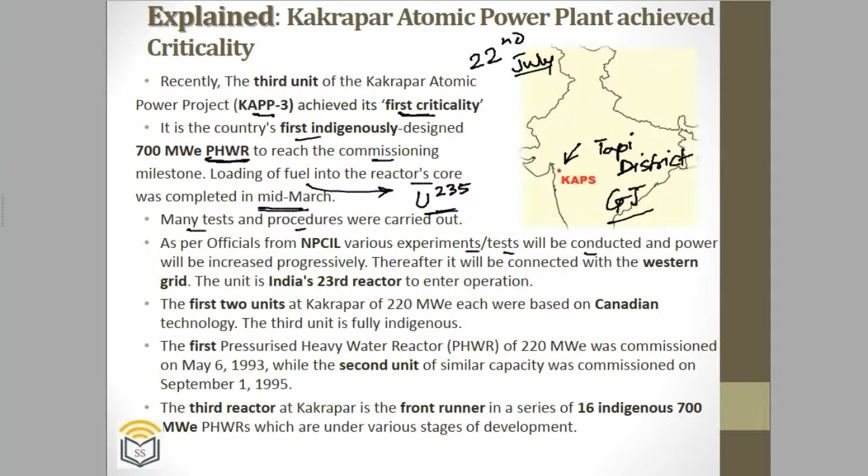After that, many tests and procedures were carried out as per the NPCIL guidelines during the lockdown period, and as per the NPCIL officials, various experiments and tests will be conducted, and after that the power produced by this reactor will be increased in a gradual manner. NPCIL stands for the Nuclear Power Corporation of India Limited,

and thereafter it will be connected to the western grid, where the power produced by this reactor will be contributed, and this is India's 23rd reactor to enter into operation. The first two units of the Kakrapar atomic power station are of 220 megawatt electric each, and they are made on Canadian technology.

This third unit is totally made in India with indigenous technology and indigenous manufacturers, and the construction was completed with the help of Indian contractors. The first pressurized heavy water reactor of 220 megawatt electric was commissioned in 1993, while the second unit of the same capacity was commissioned in 1995 at the Kakrapar power station.

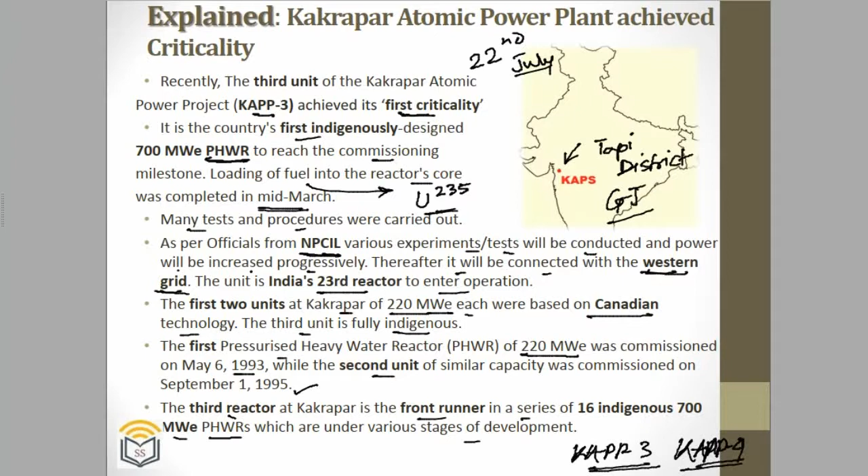This third one is of indigenous technology, and it is the front runner in the series of 16 indigenous 700 megawatt pressurized heavy water reactors, which are under various stages of development at the moment, and slowly they will be commissioned. There is another unit which will be commissioned in future, KAPP4. It is also of the same 700 megawatt capacity and also made with indigenous technology.

Now let's see some details about this third reactor. The site works at Kakrapar were completed by August 2010, and first concrete for the third and fourth reactors was done in November 2010 and March 2011 respectively. This concrete is used in atomic reactors to protect or to place the reactors, and this is done after AERB approval,

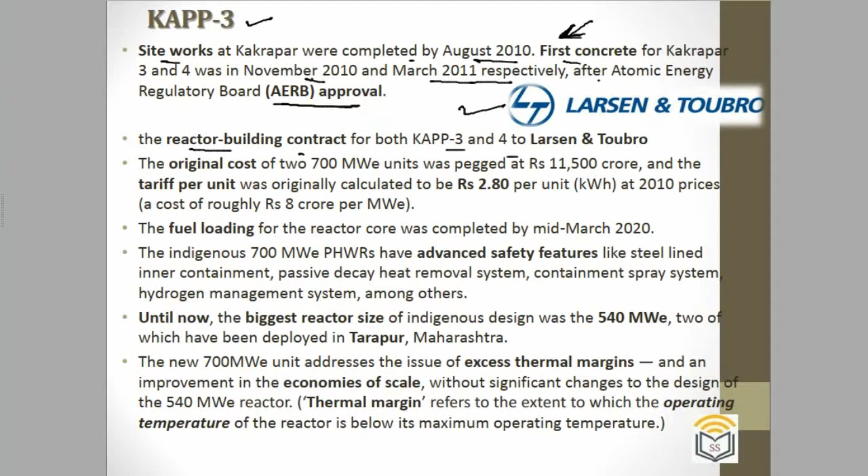and NPCIL awarded the reactor building contract for both the third and fourth reactors to Larsen and Toubro, costing around rupees 844 crores. The original cost of the two 700 megawatt reactors was pegged around 11,500 crores, and the tariff is fixed at rupees 2.80 per unit, that is kilowatt hour, at the 2010 price. If calculated, it comes to around 8 crore per megawatt of electricity generation, which is a little less than thermal power plants.

The fuel loading in the reactor core was done by mid-March 2020, and these indigenous reactors have some advanced safety features like steel lined inner containment, passive decay heat removal system, containment spray system, and hydrogen management system. Until now, the biggest reactors were in Tarapur, Maharashtra, which are 540 megawatt capacity reactors, and there are two of them there.

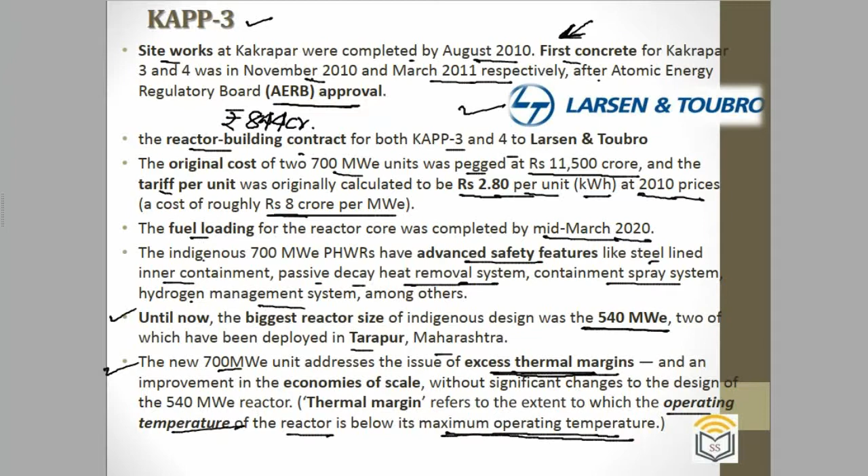This new 700 megawatt electric reactor unit addresses the issue of excess thermal margins. By thermal margin, we mean the margin between the operating temperature of the reactor and the maximum operating temperature a reactor can reach during its operation. This excess thermal margin issue is mitigated by this reactor, and it is basically an improvement in the economies of scale without sacrificing much in the design of the old reactor.

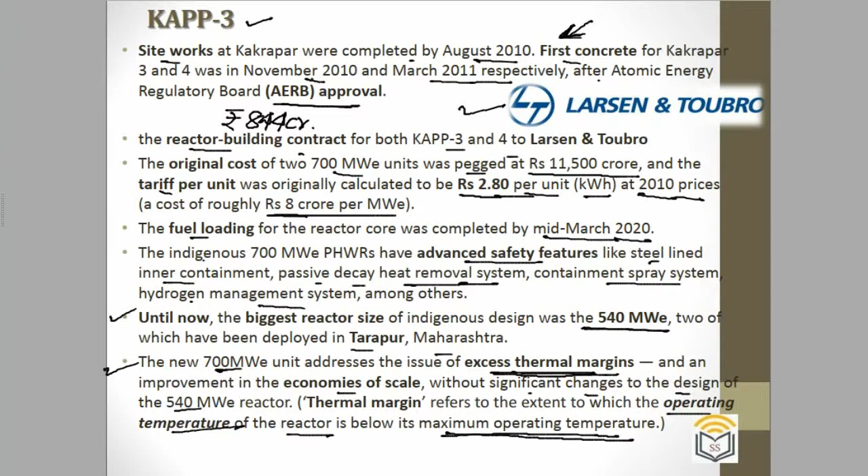So let's see what criticality means for an atomic reactor. Reactors are basically the heart of atomic power plants, and inside these reactors a controlled nuclear fission reaction takes place. Now here, mark the word fission.

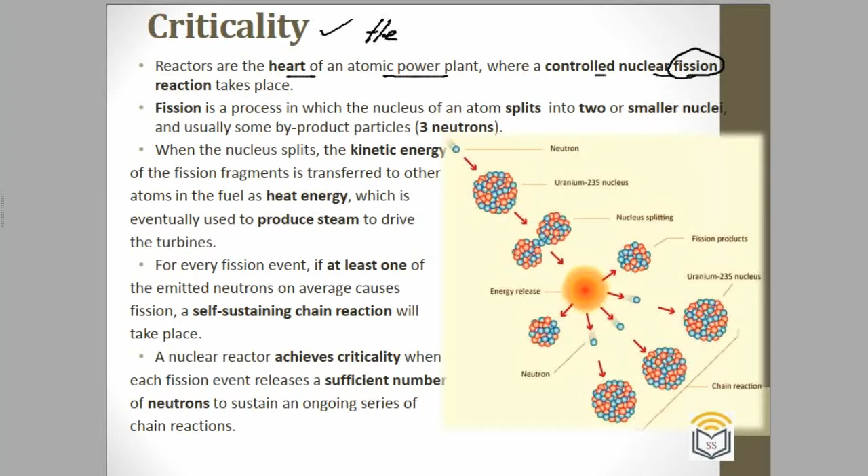By this fission reaction heat is produced, and this heat is used to generate steam, and this steam is ultimately fed to the turbines, and these turbines then generate the electricity. Now fission is a process by which a nucleus of an atom splits into two or more smaller nuclei.

Let's see this particular picture here. In this, a neutron is bombarded onto a particular atom, and this is nothing but a uranium isotope which is radioactive, that is U-235. And when the neutron is bombarded onto this U-235, the nucleus is getting split into two,

and ultimately the fission reaction is commencing, and it will create two lighter nuclei of krypton and barium. There are byproducts such as these, and these are three neutrons. This reaction releases huge energy, somewhere around 200 million electron volts. This is the basics of the nuclear fission reaction.

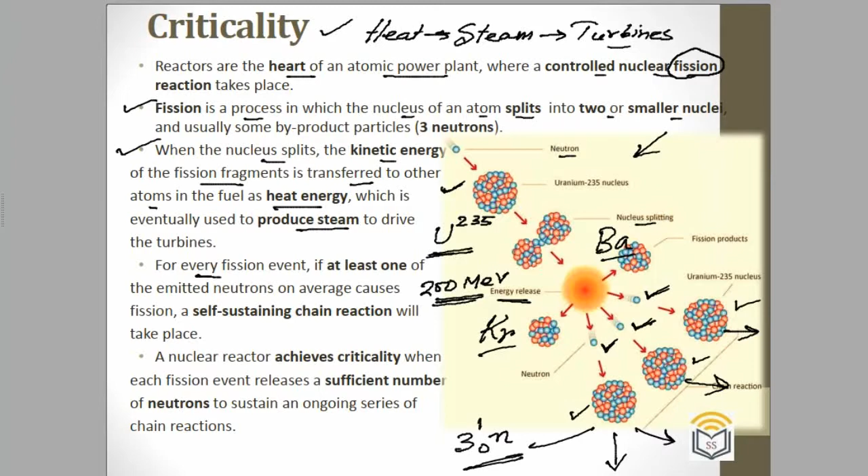So as it is seen here, when the nucleus splits, the kinetic energy of the fission fragments is transferred to other atoms. It is releasing heat energy, which is eventually used to produce steam to drive the turbines. Now for every fission event, if at least one of the emitted neutrons causes a fission reaction, a self-sustaining chain reaction then takes place. As we've seen here, a chain reaction is happening, and this is nothing but criticality.

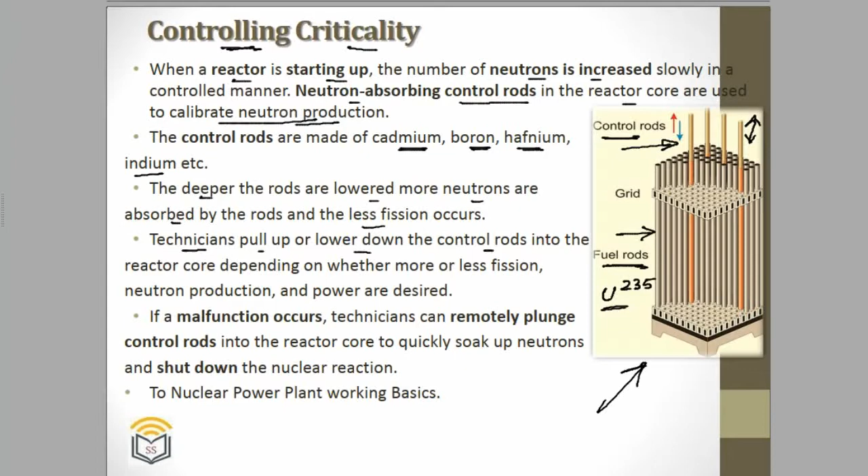So in power plants, technicians pull up or lower down these rods to control the fission reaction, that is the neutron production, and that is how they control the power as desired. And if a malfunction occurs, technicians can remotely plunge these rods into the reactor core to quickly absorb the neutrons and shut down the nuclear reaction. That is how they can control an impending accident.

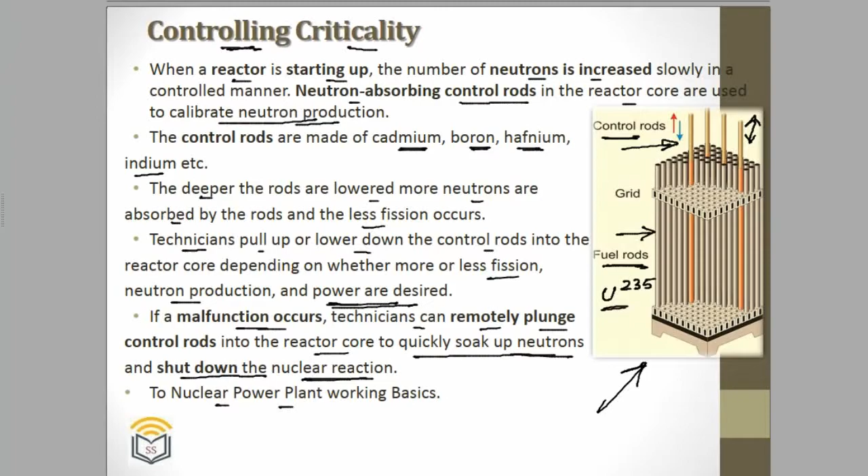So now let's see the basic working of the nuclear power plants to get a bigger picture. So let's go there. So this is a schematic diagram of a PHWR, or pressurized heavy water reactor, power plant, and this is the main area where the action is happening, that is the containment structure. And inside this containment structure, this is the reactor vessel here, and this is the pressurizer, then there is

a steam generator. So first this is the reactor where the nuclear fission reaction is happening and by which a lot of heat is generated, and there is pressurized heavy water inside of it, which is nothing but deuterium oxide or D2O, and this water is heated, and ultimately it comes in contact with this steam generator here, and there will be a separate water there, and after coming in contact with this heated water, this water will be boiled and converted into the

steam here, and this steam will be fed to the turbines here, and in this turbine the power is generated with the help of the generator, and this will be fed to the electric lines or grids. And now what happens, this particular steam is condensed in the condenser and comes back to water again, and this cycle goes on, as you can see.

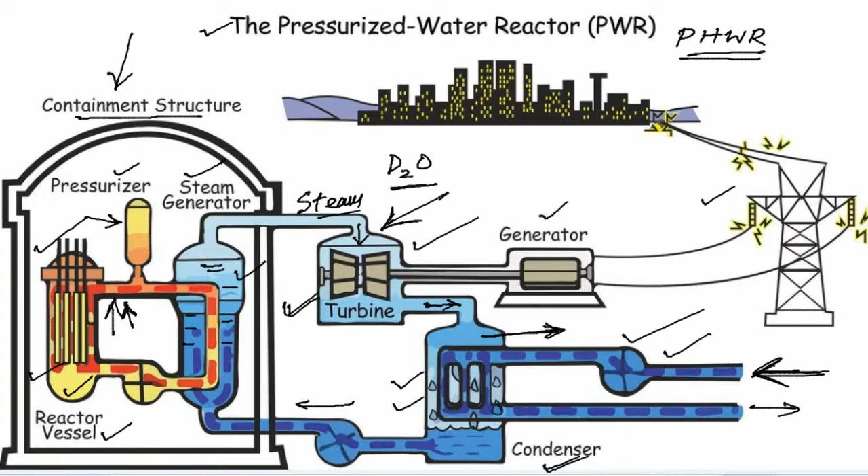So let's see why this achievement is very significant for India. Now this 700 MWe reactor is the biggest indigenously developed variant of the PHWR technology. Now PHWR, which is basically a reactor, commonly uses natural uranium as its fuel, and heavy water, that is deuterium oxide or D2O, as its coolant and moderator. And this technology is basically the mainstay of India's nuclear power program.

And this PHWR technology was started in the 1960s with a joint venture between India and Canada's nuclear corporation, by which the first 220 megawatt reactor was set up in Rajasthan. And with the second unit, India subsequently lessened the import from Canada. For the first time India pursued its indigenization plan in the setup of nuclear reactors.

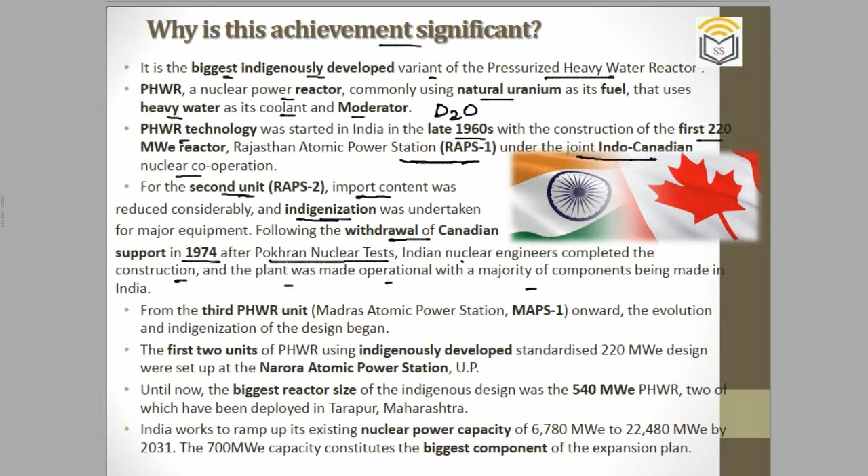And in 1974, after the Pokhran nuclear tests, there were subsequent sanctions on India in the use of nuclear technology. Canada withdrew from the joint venture, which put the Indian engineers to complete the construction, and the plant was made operational with the majority of its components made in India itself.

And from the third PHWR unit in Madras, that is in Kalpakkam, onward the evolution and indigenization process began. The first two indigenously developed units have a 220 megawatt rating, and they are set up in the Narora atomic power station, which is in UP. And the biggest reactor size until now is 540 megawatt PHWR, and two of them are set up in Tarapur, Maharashtra.

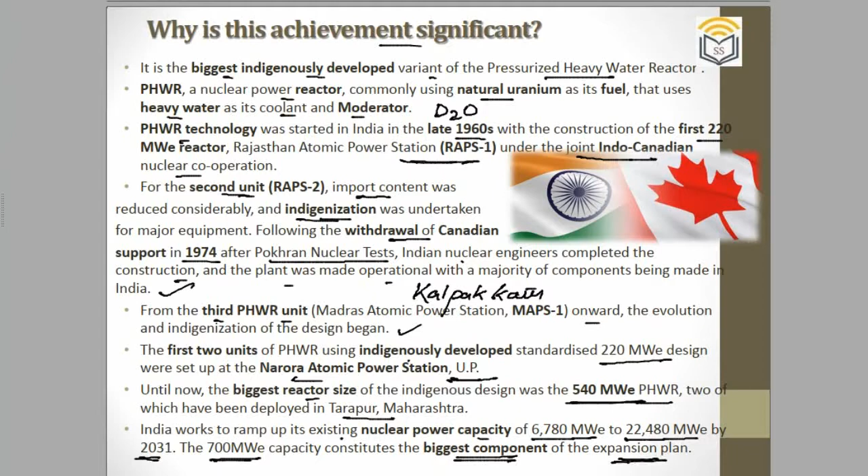And so India basically has ambitions to ramp up its existing nuclear power capacity from 6,780 megawatt to 22,480 megawatt by the year 2031. And to do that, these 700 megawatt capacity reactors will be the biggest component to achieve this dream, or the expansion plan of India. So this is the significance for India.

Now let's see the safety features of the PHWR and KAPP-3. The biggest advantage is that they have thin-walled pressure tubes instead of a large pressure vessel. Now there are small tubes like this.

Next, there are some additional safety features like the passive decay heat removal system, in which decay heat is removed automatically without requiring any operator, and there is a steel-lined inner containment to reduce any leakages in the containment area. We know that the containment area has the reactors, the steam generators and other pipelines which carry the pressurized heavy water, and this is made up of concrete.

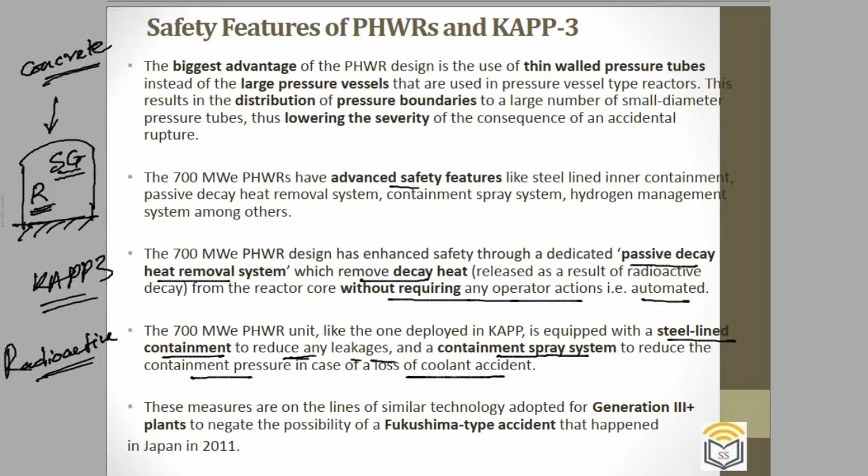In the case of KAPP-3, it also has a steel-lined inner containment to reduce any leakages, because it has radioactive elements or atoms which, if leaked to the atmosphere, are detrimental for humans and animals. It also has a containment spray system to reduce the containment pressure in case of a loss of coolant accident, and there is also a hydrogen management system.

These safety measures are in line with similar international-standard technology in Generation 3+ power plants, to negate the possibility of an accident like the one in Japan back in 2011, the Fukushima-type accident.

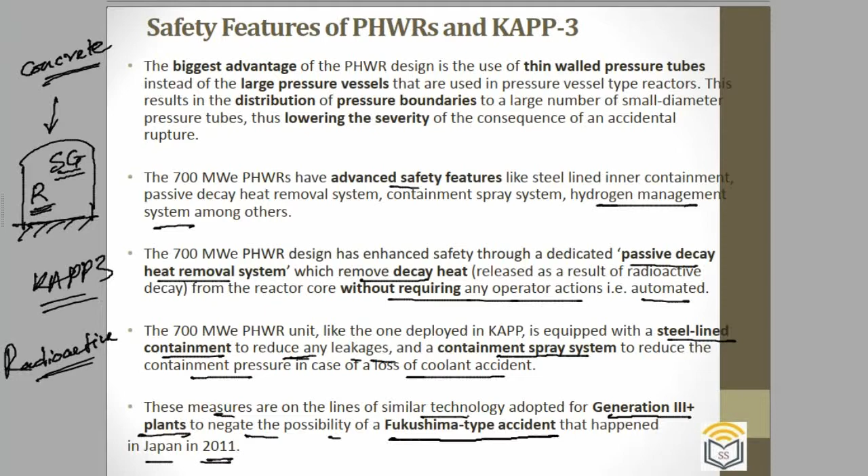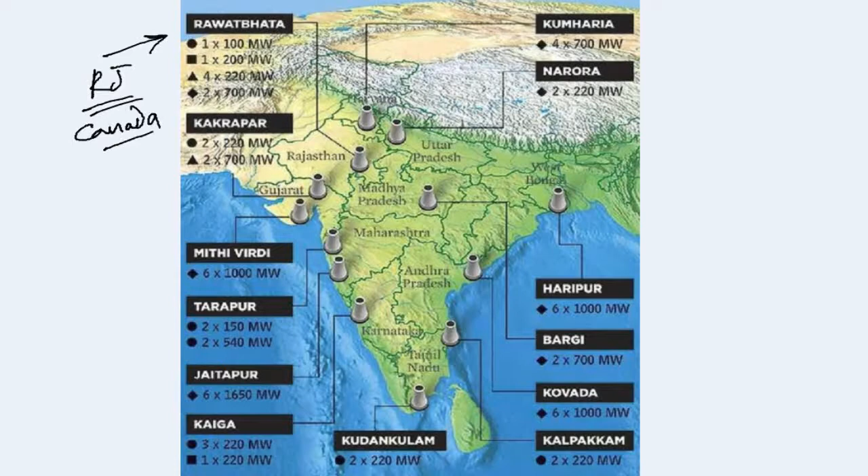So now let's see the different nuclear power plants in India. The first one is Rawatbhata, which is in Rajasthan, and this unit is in collaboration with Canada. Then there is Kakrapar, in Gujarat. Then there is Tarapur, in Maharashtra, and here is Jaitapur, also in Maharashtra, in collaboration with France.

Here is Kaiga, in Karnataka, and here is Kudankulam, in Tamil Nadu, in cooperation with Russia. There is another unit, Kalpakkam, also in Tamil Nadu. Then there is Narora, in UP. So these are the main atomic power stations in India, and the others are proposed ones, yet to reach the functioning stage.

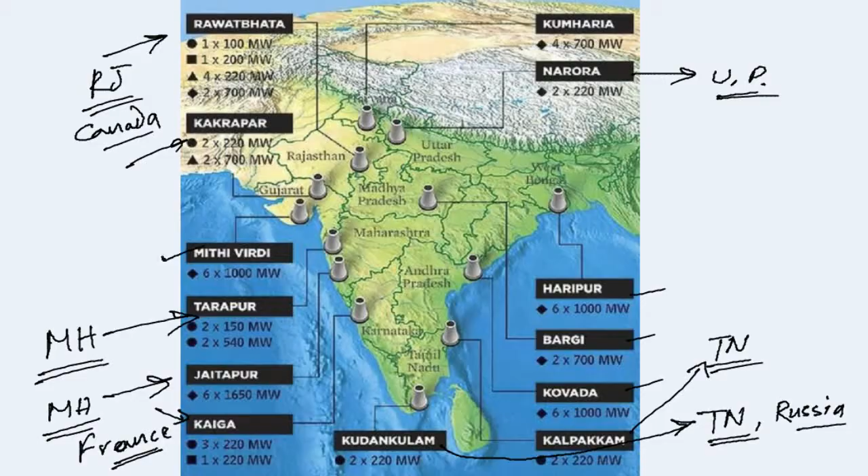Let's see some more facts about nuclear power in India. Until now there were 22 nuclear power reactors, and with the commencing of KAPP-3, this is the 23rd. Till the 1990s, Russia was a major supplier of uranium, and the waiver from the NSG, the Nuclear Suppliers Group, waived the sanctions on India so that India could commence international nuclear trade. Later, India signed Nuclear Energy Technology Cooperation with the US, UK, South Korea and Canada. India also signed agreements with Mongolia, Russia, Kazakhstan, Namibia and Argentina for new uranium supply.

In 2011, there was a large discovery of uranium deposits in the Tummalapalle belt in Andhra Pradesh and the Bhima basin in Karnataka, and these belts have a potential of 44,000 tons of natural uranium reserve. This is one of the top 20 uranium reserves discovered in the world. Between 2015 and 2019, Kazakhstan was the largest supplier of uranium, supplying around 5,000 tons to India.